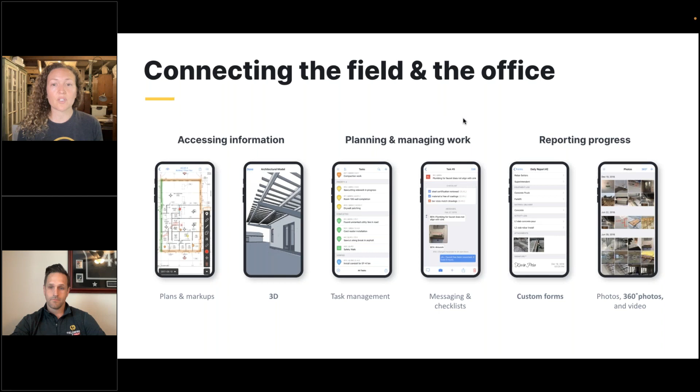During today's webinar, we're going to mainly be focusing on 3 of the tools that Fieldwire offers: plans, tasks, and RFIs. So we'll be touching on those tools mainly, but you'll of course see how we use some of the other ones as well.

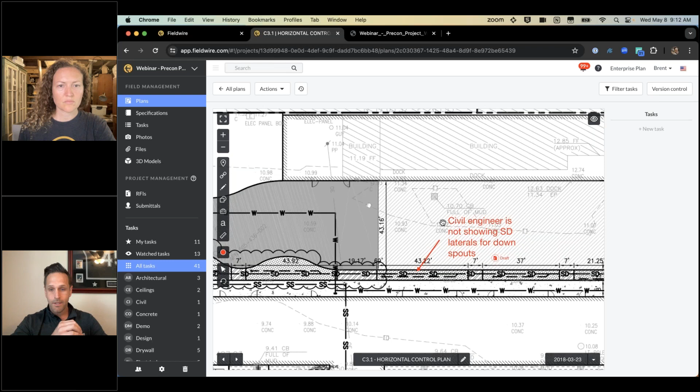Yeah, absolutely. So I can hop into a plan sheet here, and as I'm going through my bid, going through the drawings and putting together all my different line items and subcontracts, I have a lot of different comments and tasks on the drawings notifying me of potential scope gaps. Right here I have a comment from my superintendent saying the civil engineer is not showing any storm drain laterals for downspout locations at this building. So they left that comment, it jumps out at me, and I know this is a potential issue. If I have to ask a question, I can create an RFI on the spot from a hyperlink and submit this RFI directly from the Fieldwire platform.

This is great too, because I can submit this question to a particular email address. So the engineer or anybody that has to respond to this RFI doesn't have to be on the platform. All I have to do is put their email address in this field, and Fieldwire automatically sends that RFI to that individual.

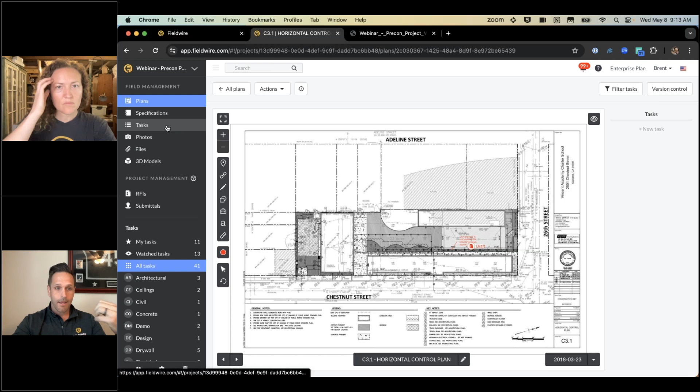Once different teams have participated in identifying these scope gaps, what do you do to make sure this gets captured by the bid eventually? Well, the comments are great and the RFIs are great as well, but I would really want to use our task feature to capture these issues, and I'll show you why here in a second.

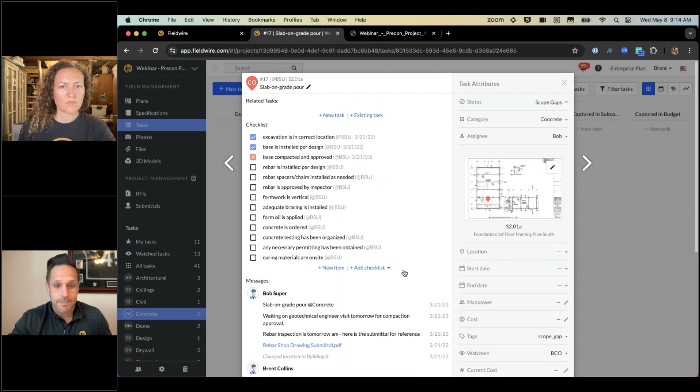For those of you not familiar with our task feature, usually our customers use this for field operations. It's a tool we can use to stay standardized for field operations and also track progress and issues. On the left-hand side we have a lot of different content we can provide, and on the right-hand side we have our attributes so we can filter and report on these particular issues as the project progresses.

In this particular workflow, we are using our statuses here to track our scope gaps, scope creep, any add alternates or value engineering efforts that we want to capture on the plans. We have two closed statuses here: red, orange, and yellow are open, and green and blue are closed. These closed statuses mean the scope is captured in the subcontract or the quote, or that the potential scope gaps are actually captured and reflected in our budget.

Can you walk us through an example of a scope gap, from identification through to being captured in the bid? Of course. I'm going to show two different scenarios here, one for a scope gap and another one for scope creep. I selected these examples because I've actually been burned by this in the past.

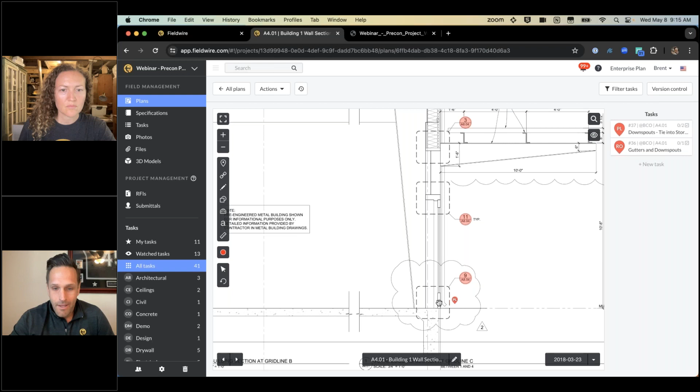In California, where I've spent the majority of my career, you have to tie your downspouts into the site storm drain, at least in the area I've been working. So I can see that this detail does not reflect that. Right there, I feel like this is a potential scope gap, something I've personally been burned by before. So I create a task here and notify myself and my project team that the downspouts need to be tied into the storm drain.

So I created a checklist here to ensure that the plumber includes the downspout to lateral connections, a total of 15. I can see that these aren't checked off and the status is still scope gap, so I know this is still an open item and potentially a scope gap on my particular proposal.

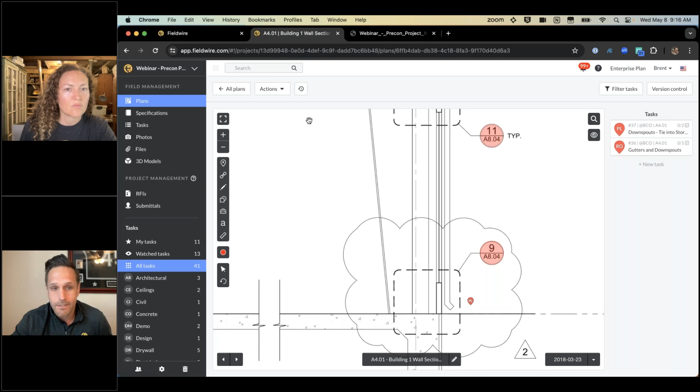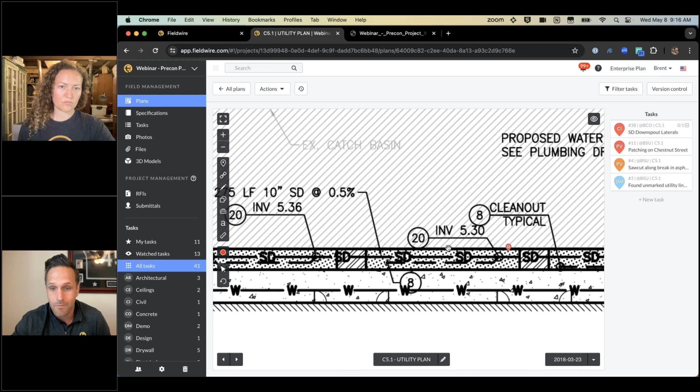But I'm also not done yet, because this also affects the civil contractor. So on the civil side of things, I can go into my grading or utility plan and look at the storm drain. Remember that my superintendent provided a comment saying that the laterals weren't installed or weren't reflected in the drawings. So I can also create a task on the civil drawings, reminding me that the civil sub has Ys and laterals to 5 feet outside of the building for 15 locations.

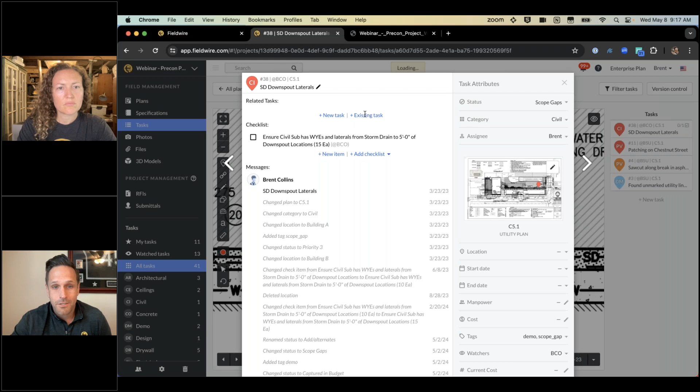Taking this a little further, I can also link those two tasks together, creating that relationship here. So no matter which sheet I'm looking at, I'm always going to be reminded of the other trades affected by this potential scope gap. Now these are all linked together.

Got it. So you've got a single task identifying the scope gap, but you've linked both tasks for each scope of work to each other, so that anytime you look at one, you see the other. Correct, because as you know, one issue in construction can lead to multiple issues across different scopes.

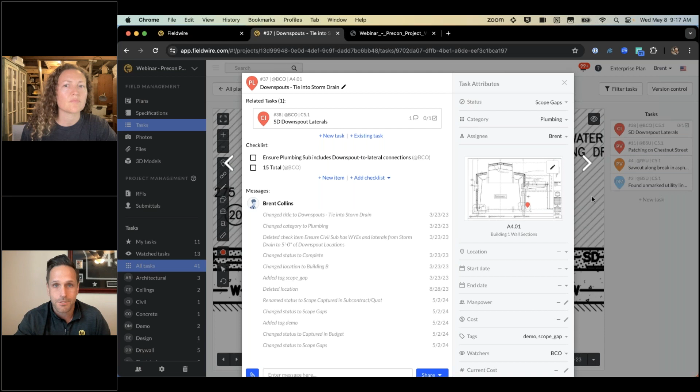Amazing. What about scope creep? Do you have any examples for that? I do. One thing that used to confuse me in the industry is sheet metal and sheet metal details. So who has the parapet cap? Usually the roofer, but if we have a sheet metal contractor on the project providing flashing and reglets for all the window and door locations, then you could have some scope creep there.

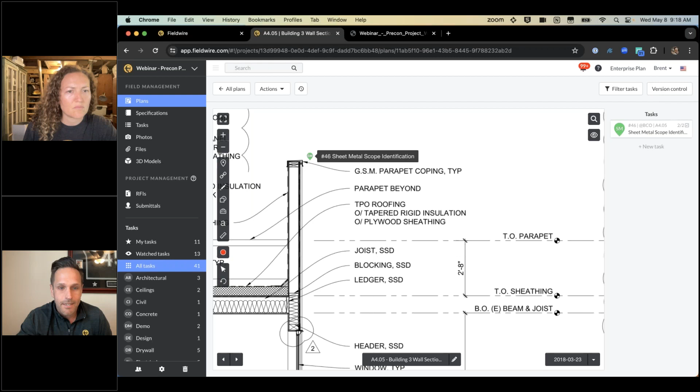So what I did is I created a task on the roofing or wall section details, and again I just reminded myself that the parapet cap belongs to the roofer, the window flashing belongs to our window contractor, and reglets fall into the sheet metal contractor's scope. So you can just check off those boxes as you make sure they have those in their bids.

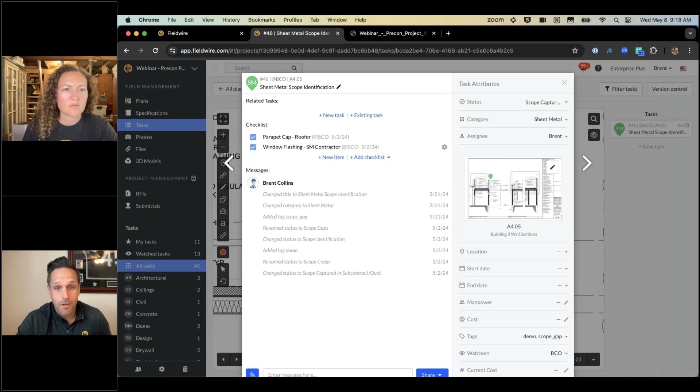Correct, so I just check those off, make sure the subcontractors have these in their proposal, and then once it's captured in the budget, I can go ahead and verify that task. From a very high level, I can see that this is already addressed. It's light blue, it's closed, it has that check mark, it's ironclad. I know that's in my budget now.

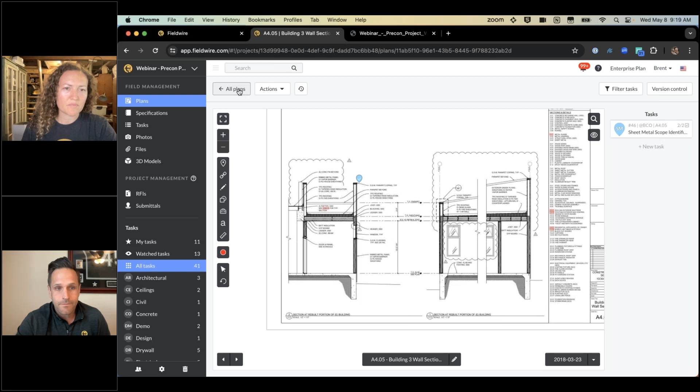Amazing, I love it. There's just so many moving parts you have to keep track of during bid preparation. I think this really highlights ways you can connect all those disparate parties. But then how do you communicate this to these multiple parties, whether they're on Fieldwire or not, but implicated in these issues?

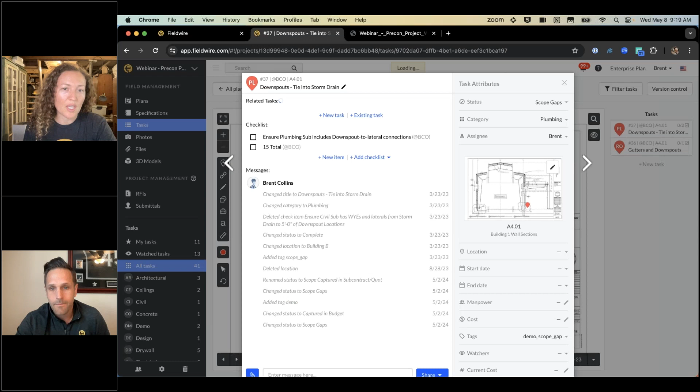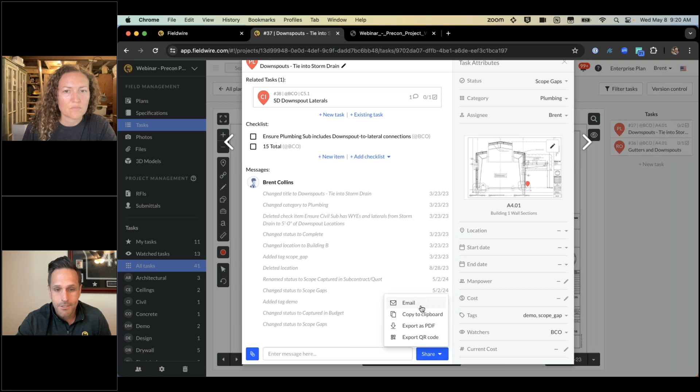Yeah, if they're on Fieldwire, I can literally assign this to the project manager for the plumbing contractors. So maybe we have pre-selected subcontractors during a design build project, or if we have multiple subcontractors bidding this job, we can actually email these out directly in PDF form to individuals who are even off the platform.

Additionally, we can create task reports by category, by trade, and these task reports can be automatically emailed to external users daily, weekly, or monthly. So you're constantly sending reminders and updated information and updated issues to your bidders on a regular cadence.

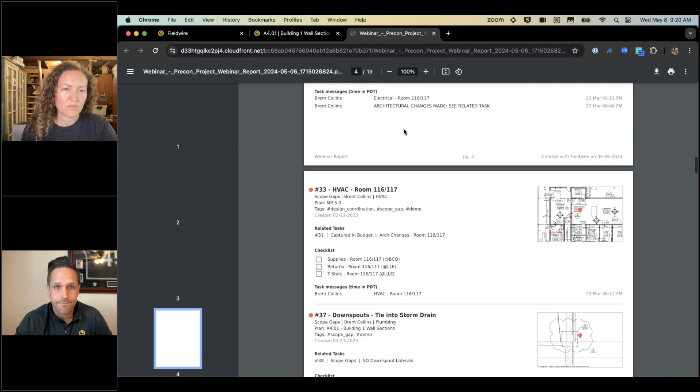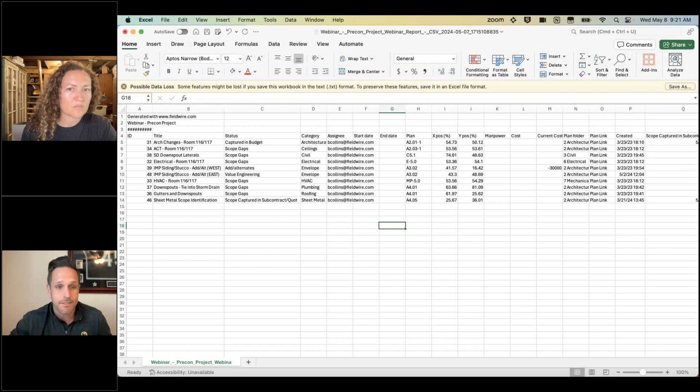And we can also export these reports into a CSV file, so if you need to extract any information out of those tasks to put into your budget, you can do so.

Awesome. That's great. Yeah, I love just the shared environment and then sharing this outside externally if necessary.

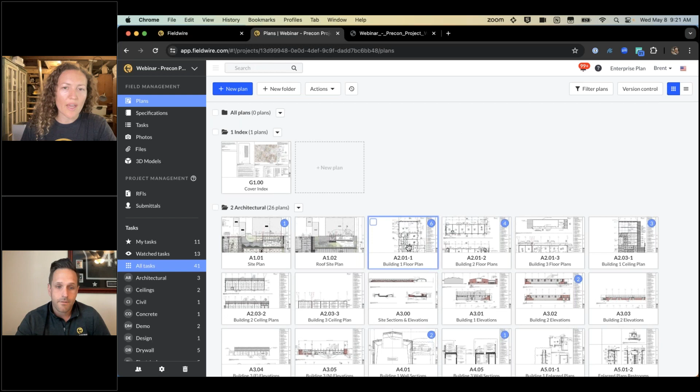What about drawing updates? In the bid process, you can sometimes be sent a new revision. How do you handle that? Anytime you get a bulletin or an addendum during the bid process, you just upload the multi-page PDF document into Fieldwire just like you would at any other time. Fieldwire is going to automatically slip sheet those drawings for you, and the newest version is automatically going to be the top layer, so any of your markups or your tasks that were on previous version sets will automatically migrate to the new layer.

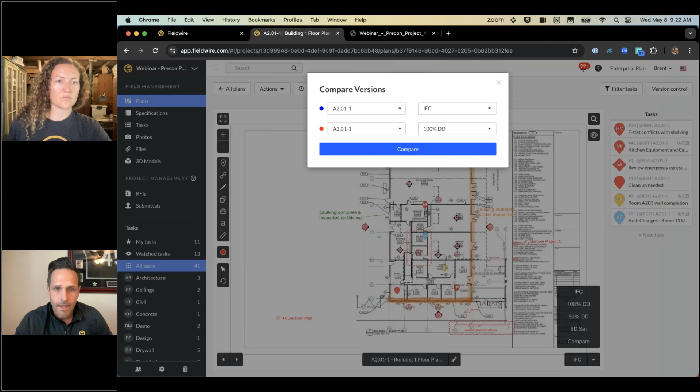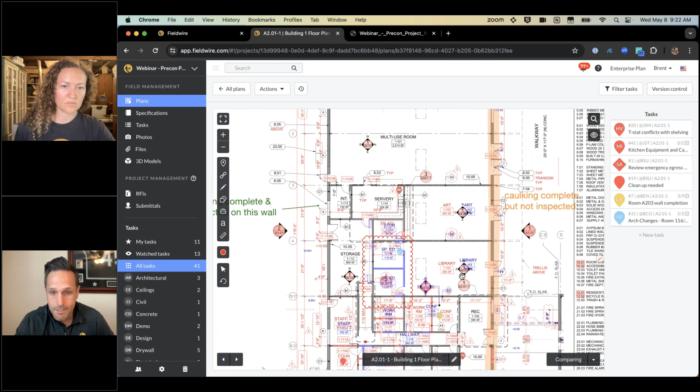Additionally, we can compare my IFC drawings to my 100% DD to see if there are any changes. Let me show you how to do that. I come down here to the compare feature, and my IFC is going to be in blue, my old drawing is going to be in red. I overlay those two drawings, hit the compare feature, and I can zoom in and see that the architect added a couple of walls here, creating 3 rooms instead of just one big room in this library room that you see here.

So I can see from a very high level that the architect did not cloud these drawings, so I went ahead and used Fieldwire's markup features to cloud this area. And then I created a task here that tracks all of the potentially missed scope. And again, I have my related tasks for the other design disciplines like HVAC, electrical, and ceilings.

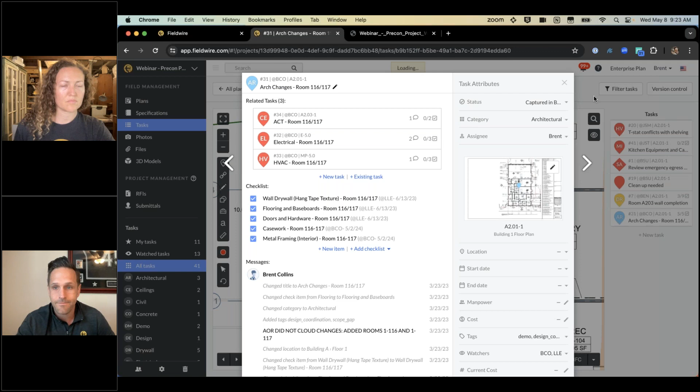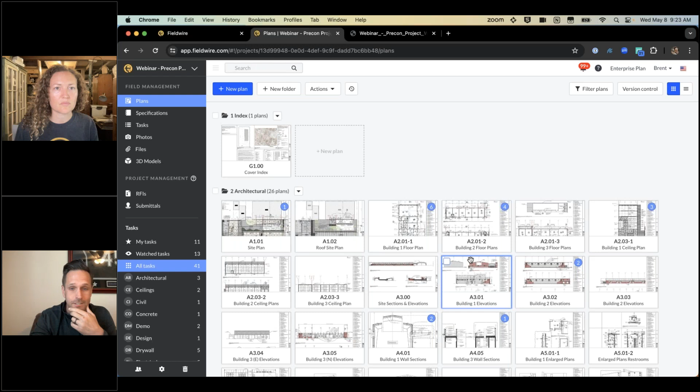Thank you so much, Brent, for showing these workflows and how they've worked successfully for some of our largest customers. I think we can see coordinating these potential scope gaps and scope creeps on Fieldwire makes it incredibly easy for the entire team, from the estimator to the foreman, to ensure that nothing is missed on the bid, and it can save thousands if not hundreds of thousands of dollars for those companies. Absolutely. One of my largest customers uses this predominantly for pre-construction all over across the US, and it definitely pays for itself.

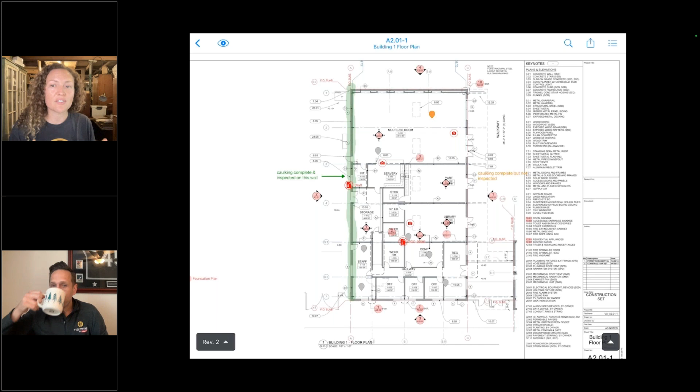Fieldwire's field access. I think one of the best ways to leverage Fieldwire in the estimating phase is for the site walk. As you know, site walks can be difficult to get to, it takes time, and you usually want to get in as fast as possible and get out as fast as possible, so making sure you take accurate notes can really influence the accuracy of your bids.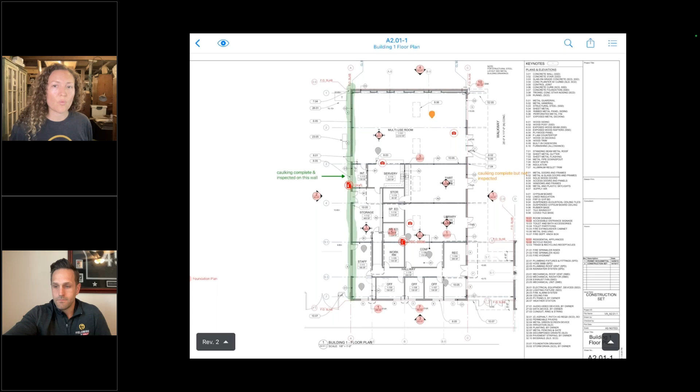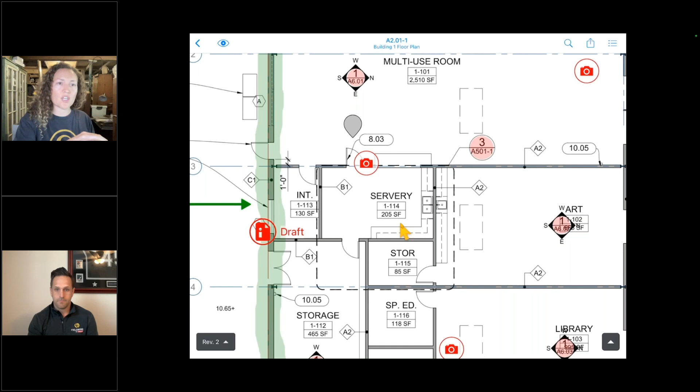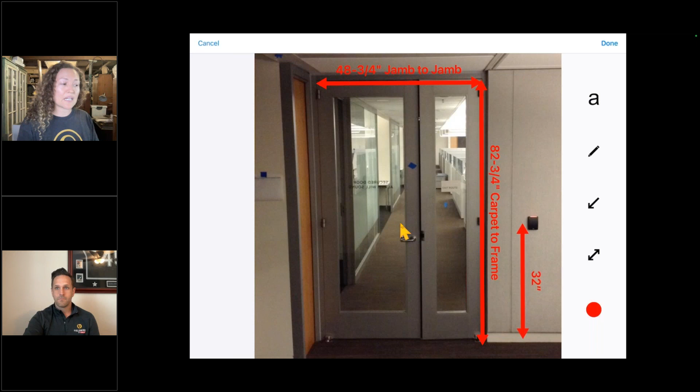So one of the features I love to share for the site walk is definitely our hyperlinks tool with the photo pin. In our hyperlinks tool, you have this photo pin icon, it's a camera, and you can simply place that on the drawing. Once you do that, you have photos that are pinned to the location on the site. So I have a photo pin here, I was able to take a picture of an existing door, and I could even mark it up with some pretty specific measurements that I needed to take, explaining what the measurement was from jamb to jamb, and I can get some nice markups on it.

Information that can be challenging to communicate on a 2D plan, so I love using our photos tool with the markups on the photo tool.

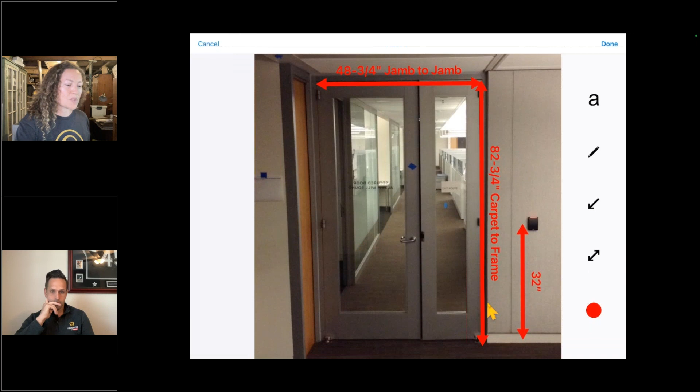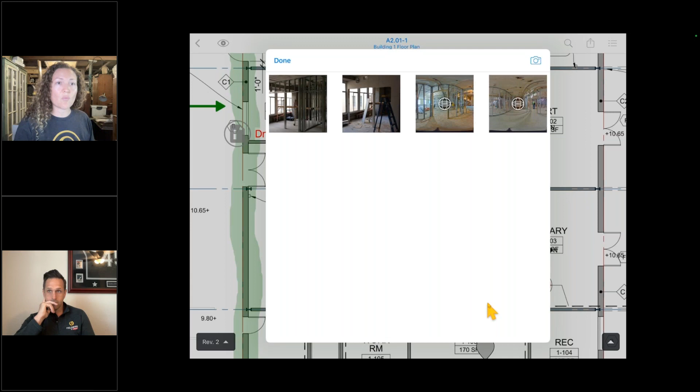If you can't make it to the site, another useful feature with our photo markups is the 360 photos. If you purchase a 360 camera, you can send someone who has a little more time on their hands, maybe a newer employee that's newer to the industry, to take 360 photos of the site during the site walk, and then you can reference those back at your office when you're preparing the bid, and you never forget anything because you've got that 360 replica of the site available to you throughout the bid process.

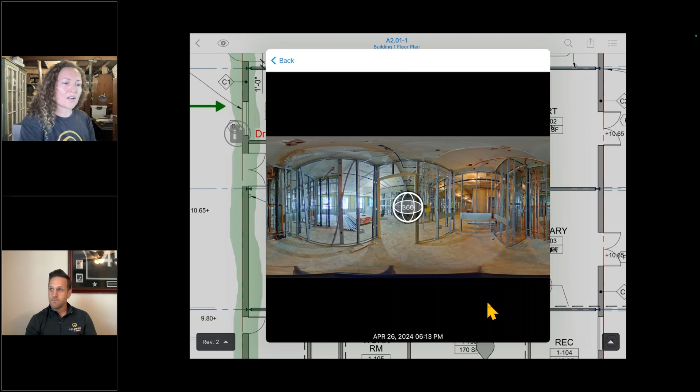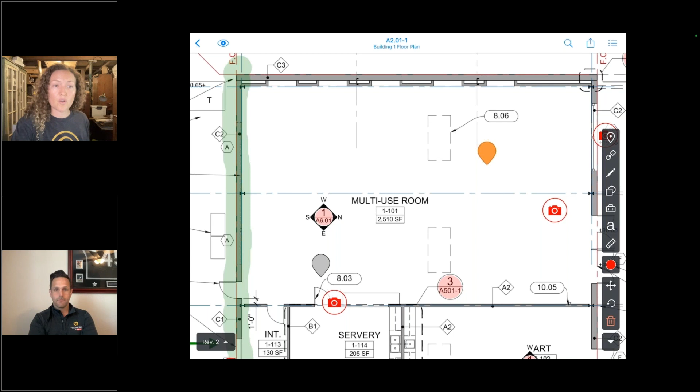Photo pin icons during the site walk are a great way to leverage Fieldwire's field capacities. If you get asked while on site, say, to replace all existing outlets with GFCIs, who really knows how many existing outlets there are? If that information isn't provided, you may need to get a quick count while on site.

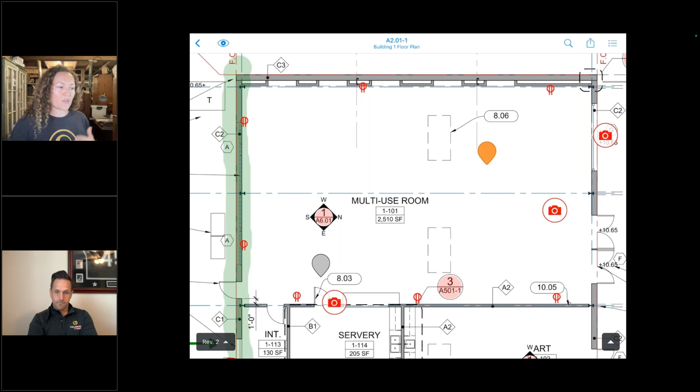Our markup symbols offer a fast way to get a quick count and markup data of the existing site onto a plan, which can later be incorporated into the bid using some other tools I'll show you. I can pull the electrical symbols, grab the duplex receptacle or GFCI symbol, and mark it on the plan everywhere GFCIs are needed at existing outlets. Those are some quick tools available to you. We have other markup tools, but on site walks, just getting those notes can be really helpful.

Once you complete the site walk, you come back to the office and need to actually prepare the bid. You're going to need true counts of everything, and even potentially linear takeoffs. So I'll show you some of the ways you can achieve that in Fieldwire.

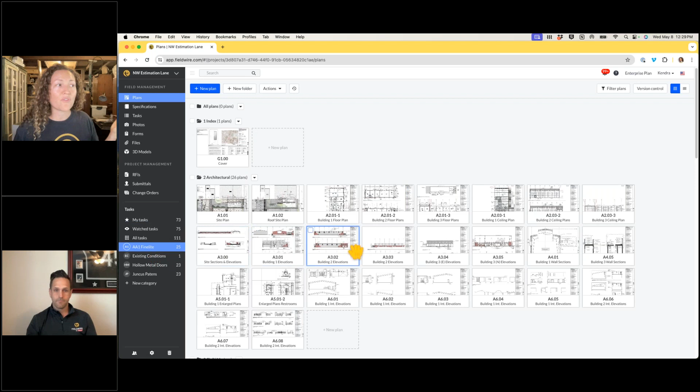One of the first ways customers achieve counts is through our tasks feature. Essentially, they set up a category for that element of the project, then create counts of those elements so they can quickly see how many, for instance, AA1 Finelite fixtures they have on the plan. I've got 24 on this sheet and 1 on this sheet. For hollow metal doors, I've got 23 on this plan, and I can even see where those doors are located.

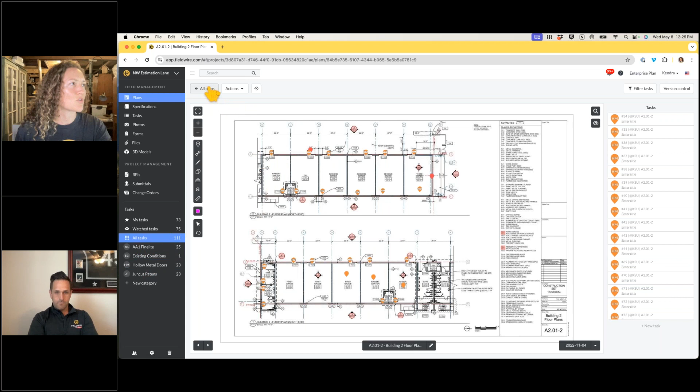For achieving these counts, I'll head to the electrical plan and show you on the Finelites. You first create the category of the element—here I created AA1 Finelite, which is what this fixture is. Then I engage the category and create a task, and that task will now have that category.

With this Finelite, I went ahead and added a couple other useful elements using our custom task attributes. I included the voltage as well as the watts of this fixture, and the linear feet of each fixture, so that later for my bid I'm able to quickly see how much power we're going to need to power these fixtures.

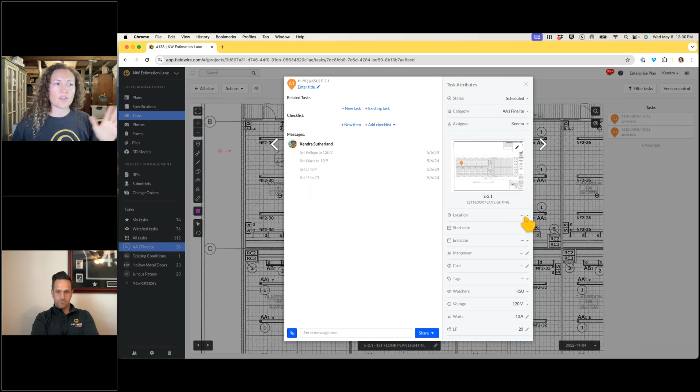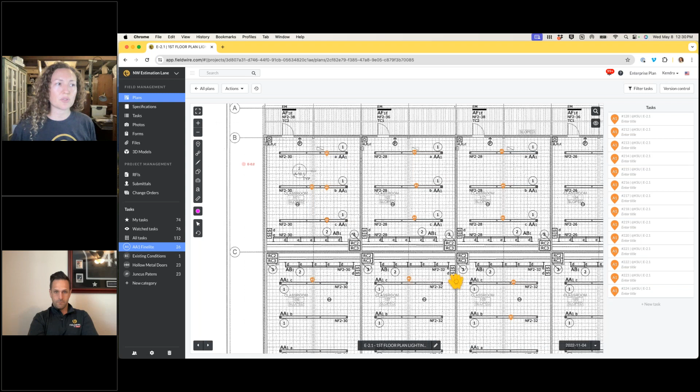So I create that task with all the elements I want in the right category, potentially on the right floor, everything like that. Then I just right click the task and duplicate it. While holding shift, it allows me to duplicate the task more than just one time, so I'm just clicking away for all my AA1 fixtures. That's a really fast way to create multiple tasks at once for counting certain elements.

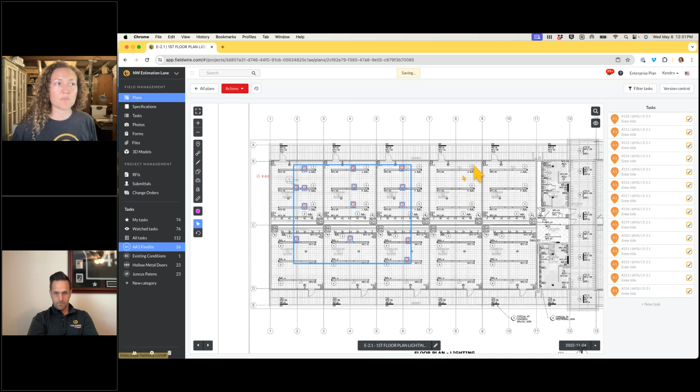You can also leverage our copy paste feature by selecting the tasks using our multi-select tool here on the toolbar. I can then right click those tasks and copy and paste them onto this plan if I have multiple lights in the same configuration, or copy them to another sheet, as I did here, copying all of them onto this sheet. That's how you can achieve some counts quickly.

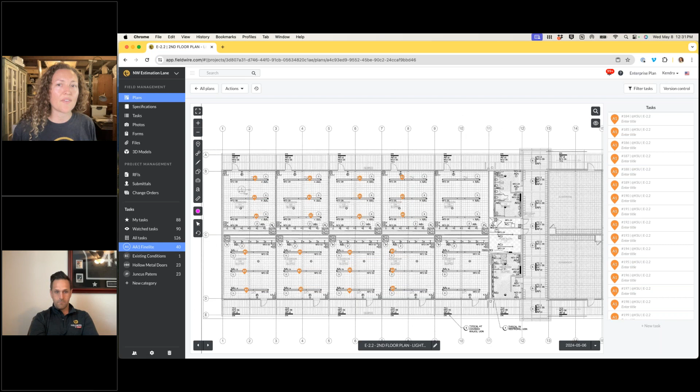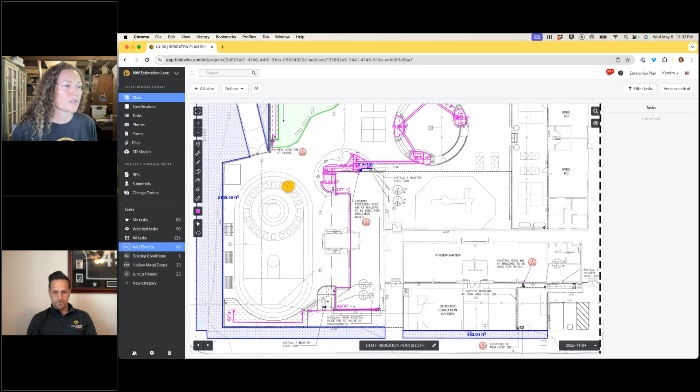Finally, if you want to do linear takeoffs, we also offer measurements with linear takeoffs, multi-line measurements, and area takeoffs. If I go to my irrigation plan south, you can see I've done a number of area takeoffs to correspond to the drip areas and the amount of drip required in those areas. I also have my spray areas respectively, and I did some multi-line measurements for different size piping that I'm going to require.

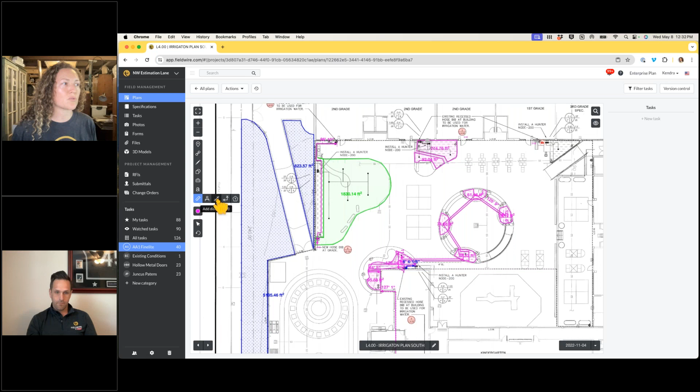You can use different colors for different size piping. I can take the multi-line tool and choose maybe green if I want a 1-inch pipe for this spray area, and then I can also do a multi-line measurement of the same size piping.

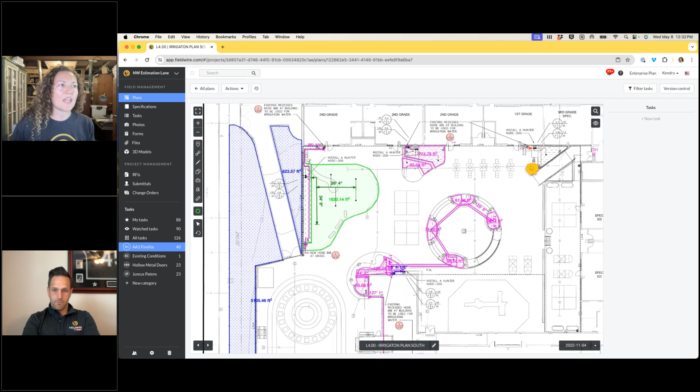So those are multi-lines, lines, and areas. And then if you have a symbol or an element on the project that you don't have a markup symbol for, you can actually use text to create your own custom identifier.

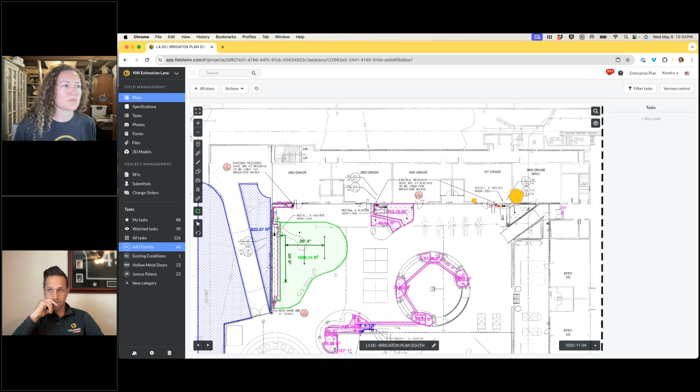So here we have a hose bib, and this hose bib requires detail 3, and on that detail, it shows quite a few elements. It's a recessed hose bib, and so it gives me all the different components that I'm going to need for this hose bib installation. So I can price all that out, put all these components together, but the next thing I need is a count of how many times that instance of hose bib occurs.

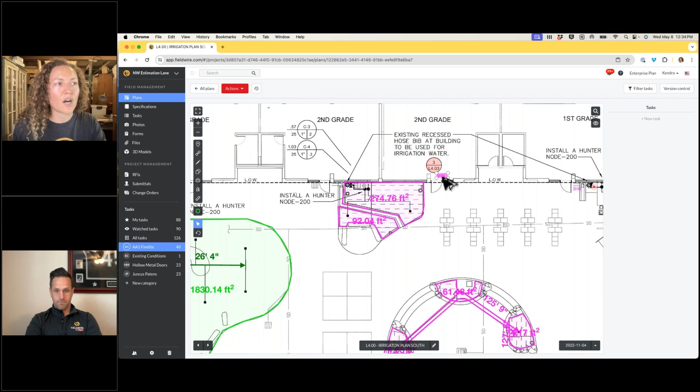So what I can do, since we don't really have a symbol for that recessed hose bib necessarily, and maybe I don't want to pick a symbol that exists, I can just use text and create a text box here. Then I can grab the multi-select tool and click the option button, and you notice how my cursor changes to copy. This then allows me to copy the text multiple times. So that's how you can copy symbols or text multiple times on a project using the option key with this multi-select tool. So those are some ways to use our markups features to achieve some of your counts and takeoffs.

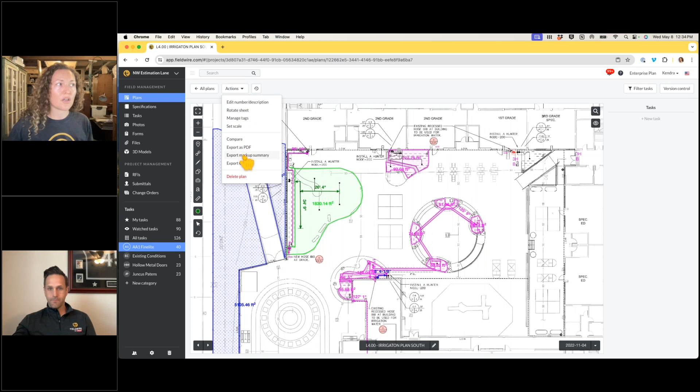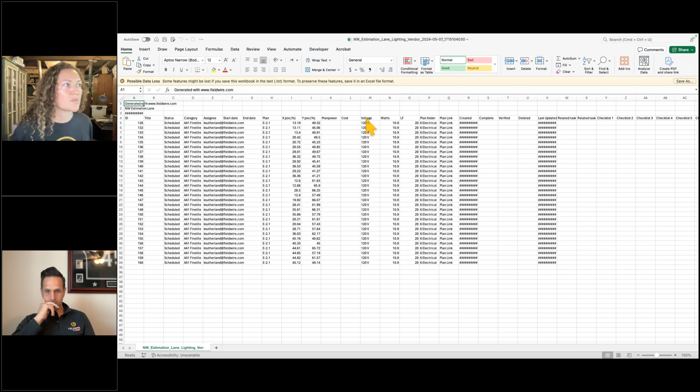But then you need to be able to export this into the format of your bid, so you need these counts exported. What you can do is export a markup summary of just one sheet, or I can also export a markup summary for the entire project. So I go to select all plans and do export markup summary when I've completed all of my counts on the project and takeoffs. This would be the example of what you would receive when you export that markup summary for just a single sheet.

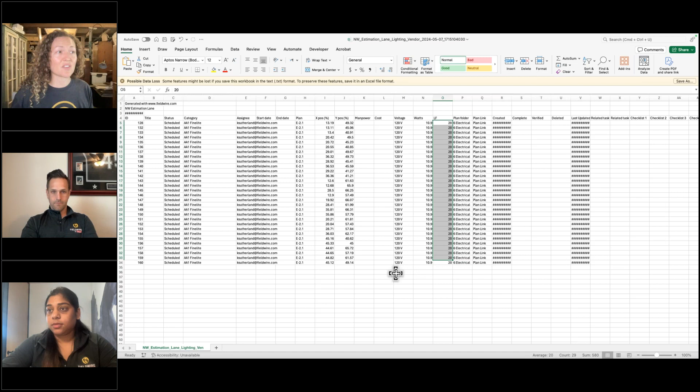This is the AA1 Finelite. I can get a count of this, and I can also see my wattage and the linear feet, so I can do a quick calculation for the total wattage that's going to be used for all of these lights on that floor and figure out what size panel and how many circuits we're going to need.

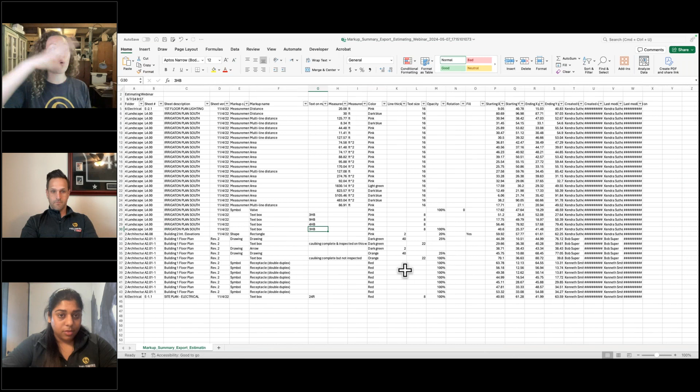I can also then export the markup summary for the whole project, and here I can see all my irrigation takeoffs, my distance measurements, and get the totals for those. If I want to filter this for certain markups, I can filter it. And then I can also see my receptacles that I captured from my site walk. So everything can be exported and then incorporated into your bid right from here.

So from the site walk to collaborating with all of stakeholders, as Brent showed you, we want to help you ensure that you have a sound bid. Fieldwire continues to add functionality that helps you collaborate and coordinate your work from pre-con to closeout, and we continue to build out more features.

So hopefully you learned something today, but we now have some time for some questions.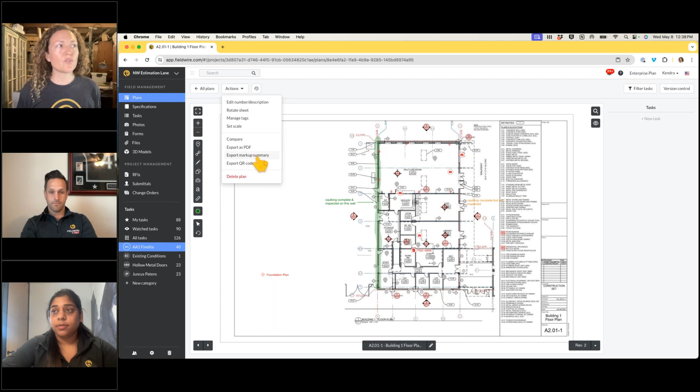Yeah, so the first question is just, do you want the markups from one plan? If that's the case, you simply go to that one sheet and click on the Actions button, and there is an option to export markup summary, which will send you the CSV file for just that sheet. If you want to export the markup summaries for multiple sheets, you can select multiple or the entire plan set, and you can export markup summary from there as well.

Awesome. And if you go to the markup summary, you can actually look at all your text, your 3HBs. You can filter them, you can count them, and also you can count all the different, or add up all the different measurements that you have, right?

Yeah, and you can put a filter on, and you can even filter to different sheet versions. So if you did get a revision and you did takeoffs the first time around, and now you want to compare them against some added takeoffs that you had to add now that there was a revision, you can see that comparison.

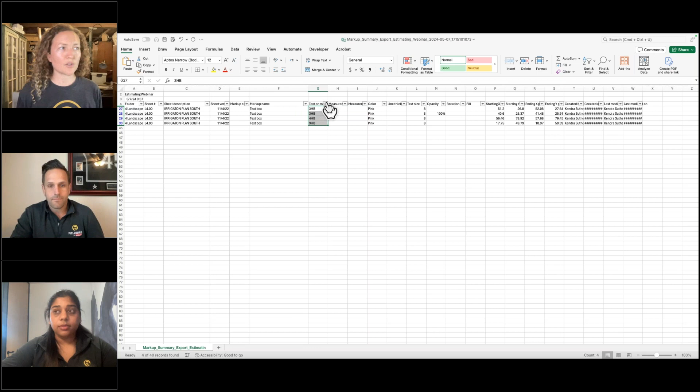But yeah, you can filter. I'll just show you, like, if we want to filter to those hose bibs that I was telling you about for the text, I can select those, and now I can sort it by the different types. So I see I have two, and this is a small quantity, but on a larger project, you may have multiple sheets with that.

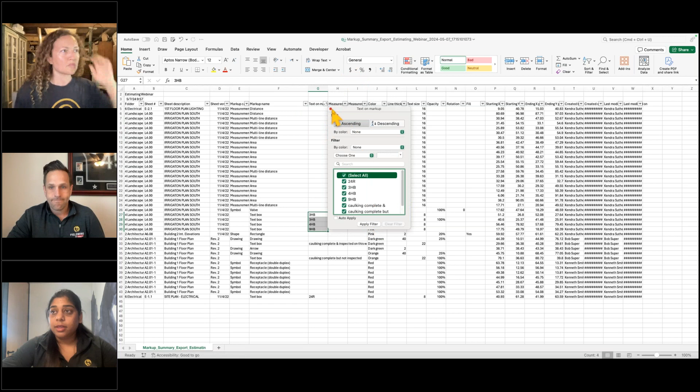Awesome. Brent, the next question is for you. Can you basically get into a little bit of detail about how you've exported the tasks that you've created for your scope gaps and scope creeps for people who are not on Fieldwire, both the PDFs and the CSVs?

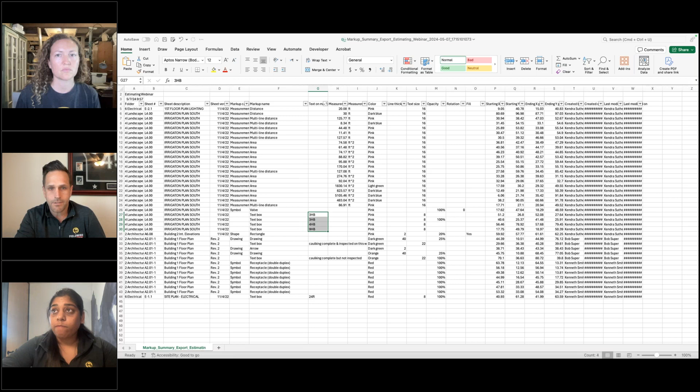Yeah, absolutely. So should I go ahead and share my screen real quick? Sure. Just give me a second.

Can you guys see my Fieldwire screen? Sorry, not the... okay, cool. I think we're good. Awesome.

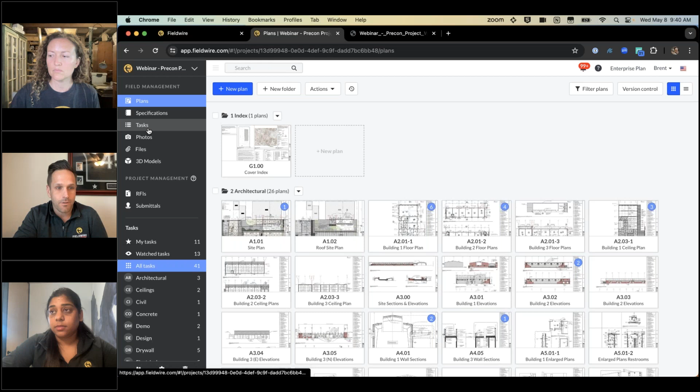So if I just go to the main task module here and go up to generate reports, I can create a new report. Let me open up my webinar report. This window will pop up and we have an option to do a summary, detailed report, or CSV. I'm going to stay on detailed report here.

I can create a report specific to a particular category. Let's say I created one for my plumbing subcontractor, so only my plumbing category tasks will show up in this report. I can put in the subcontractor's email address and schedule that to be sent daily, weekly, or monthly. I'll send them a report on Monday, so at 5 o'clock in the morning they'll have an email with a detailed report detailing all the different scope gaps and scope creep issues we've identified on the plans.

Awesome, thank you for that. The next question is, is there a way to overlay electrical plans over architectural plans? Just overlaying different kinds of plans.

Okay, you can compare any two drawings. I could select this drawing in the architectural set and then come down to one of the electrical drawings, then click the actions menu and click compare. So I can compare these two drawings that way.

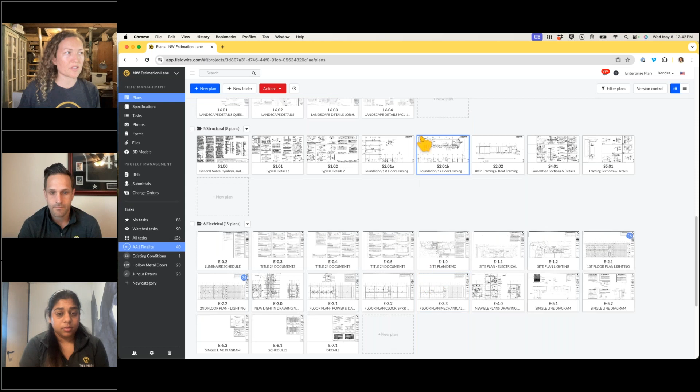Also, if you're on the drawing itself, let's say you're looking at this drawing and I realize I need to see what the electrical shows the way Brent showed it, you can come here to compare, and then I can search for the electrical drawing I want to show, and compare from here as well.

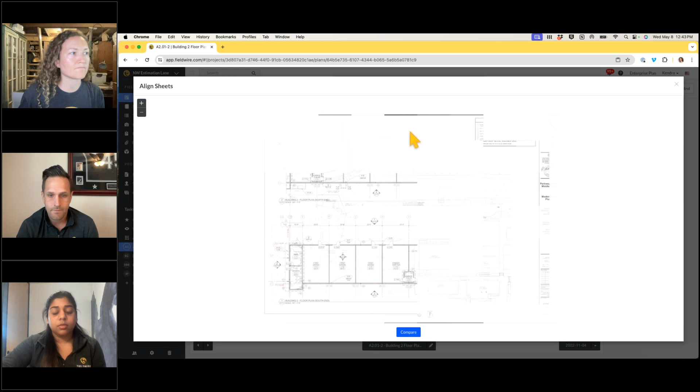Awesome, this is really helpful for overlaying an architectural floor plan with a reflected ceiling plan as well. A lot of my customers use that.

Awesome, thank you. Kendra, this question is for you: what is the key command to duplicate objects or text fields?

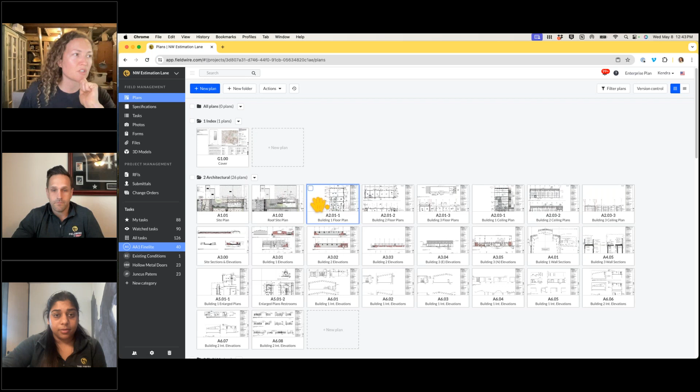So there are two options. For duplicating tasks, it's shift. But if you're using this multi-select tool to select a symbol, you can actually duplicate that symbol by clicking option - that's on a Mac. On Windows it might be option or control, but you'll know it's the right one.

I'm pretty sure it's option, actually. It's not control, it might be alt. Is it alt, option? Yes, alt. Okay, alt on Windows, option on Mac.

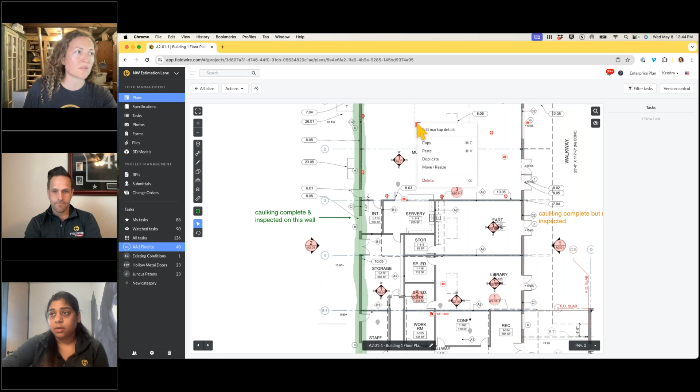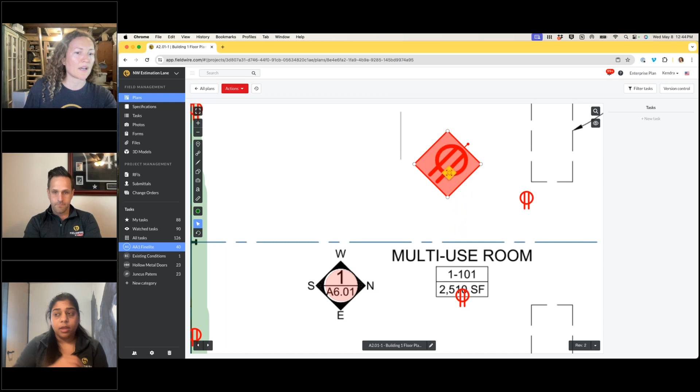You'll know it's the right key because when you hover your mouse on the symbol, when it's selected using this cursor multi-select tool, you'll get a symbol with two cursors on top of each other, indicating you can now copy these, which is useful if you resize one of these symbols. So if I move and resize this symbol, I can rotate it and also make it larger, and now that I've changed it, I may want to duplicate that one without redoing it.

Yeah, so I think the key to change or duplicate it on Windows would be Alt. All of us actually use Mac, so we're more well versed with option, but I think it's either Alt or Control. Yeah, Alt is probably it because Control is like our command key.

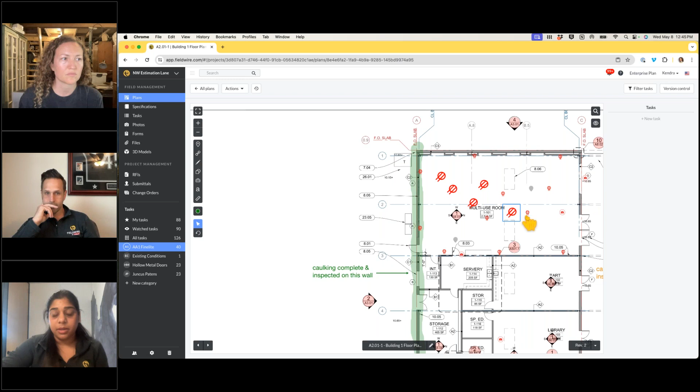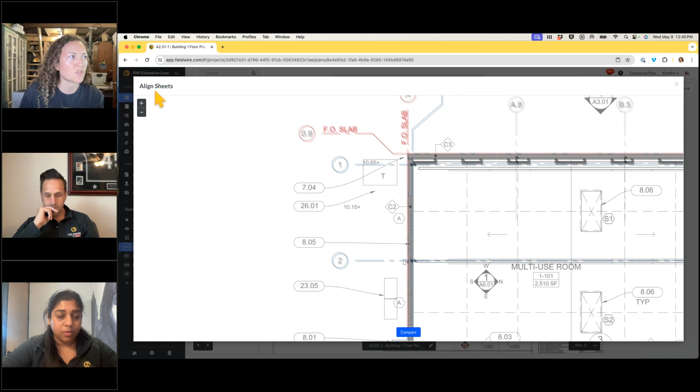Awesome. So going back to the overlay, can you slide the overlay plans so that they line up? Yes. So if I compare two drawings, there's a reflected ceiling plan for this - just overlay any two drawings. You can see here they're slightly off, so I can move them in this screen where it says align sheets.

Awesome. That's pretty much it with the time.